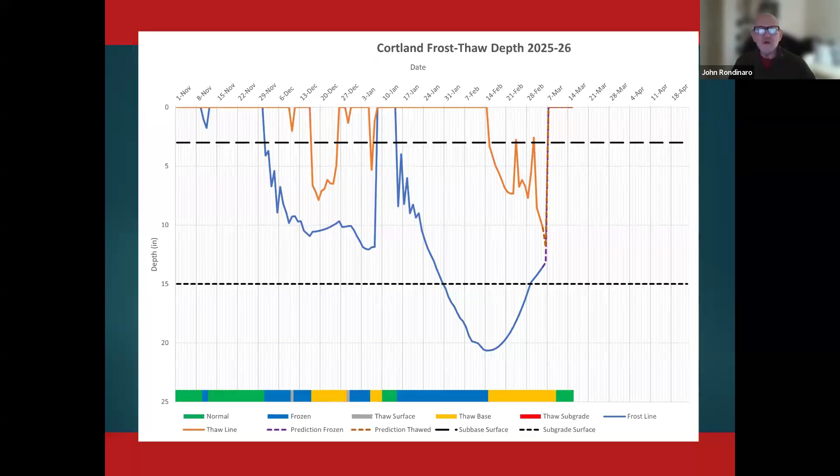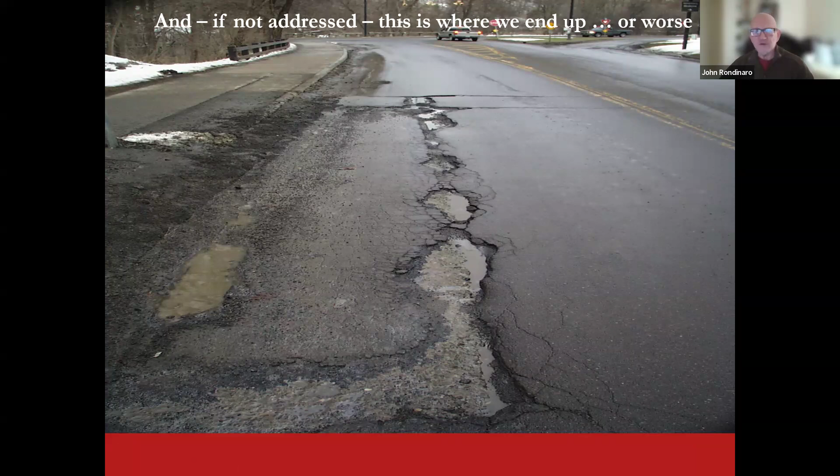We'll talk more about that in a minute. But this is just a nice example of the cycling that happens in all of our winters. This is what's happening over time, especially at the surface—we're noticing the development of cracks. This is where we can end up, or worse, where those cracks greatly advance into a well-deteriorated, well-potholed pavement section.

So stepping back to the basics for a minute, what's the purpose of our roads? They're to move people and goods from point A to point B—it's the backbone of our economy. We use a process called pavement management, our decision-making framework. Within that framework, we inventory our roads and conditions, then perform required work based on that inventory. The principles we follow are right repair, right place, right time. My add to that sequence is right way, because if you're not doing it the right way, you're throwing your money away.

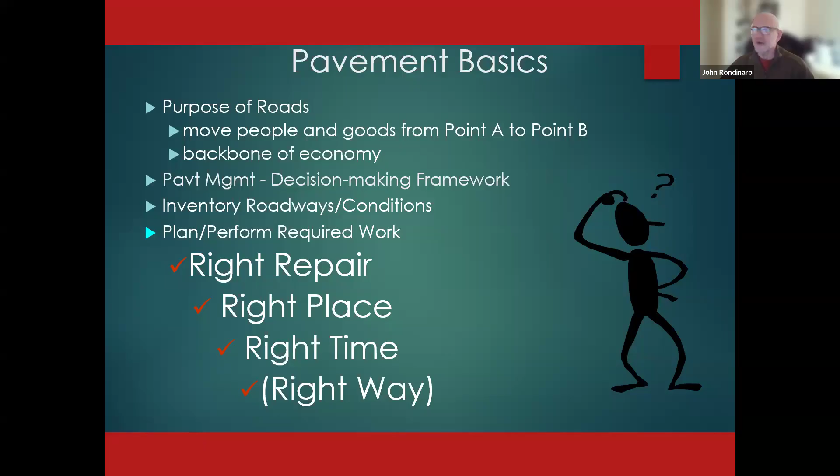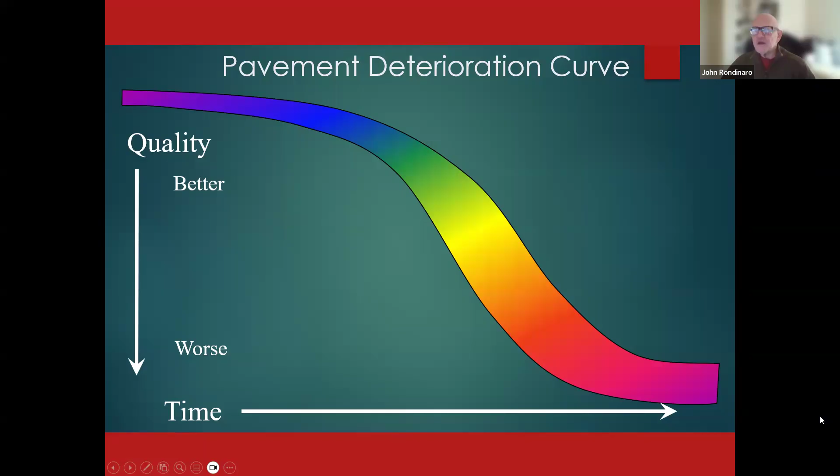Quick look at the way pavements behave over time. This is a typical generic pavement deterioration curve. You start in the upper left-hand corner with a new or like-new pavement. Over time it deteriorates from high quality to poor quality, and at some point, down at the end, it's pretty much falling apart.

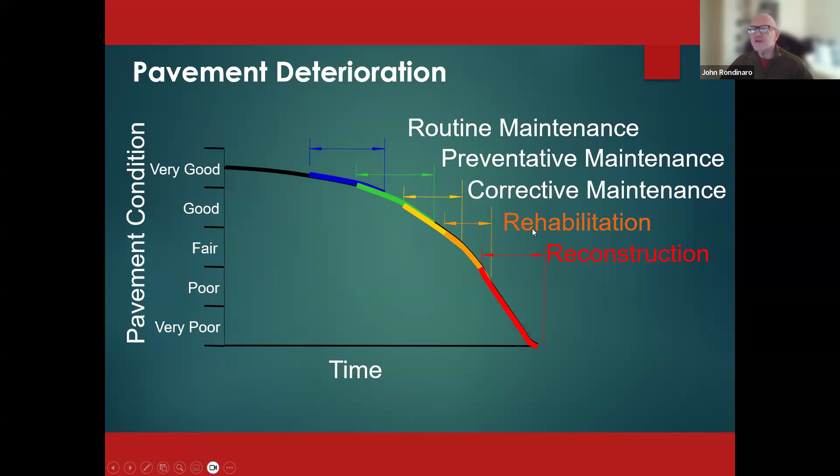If you look at that same pavement curve, you can overlay the types or categories of work that could and should be done for each condition scenario. We're always doing routine maintenance—things like mowing, shoulder and ditch maintenance. While the pavement is still in good condition, we're doing preventive maintenance, or what we'll be talking about today under the larger category of pavement maintenance. As it deteriorates toward the low end of good, you're doing corrective maintenance, and once it falls into fair or poor, you're moving into rehabilitation and then reconstruction.

And why is that important? I think probably everybody on this webinar has seen a slide like this. For every dollar of maintenance you spend when the pavement is in good, approaching fair condition, it's going to cost you at least 4 to 5 times as much in rehab. Some current assessments done by the feds have said that can be up to 20 times the cost of the pavement maintenance activities.

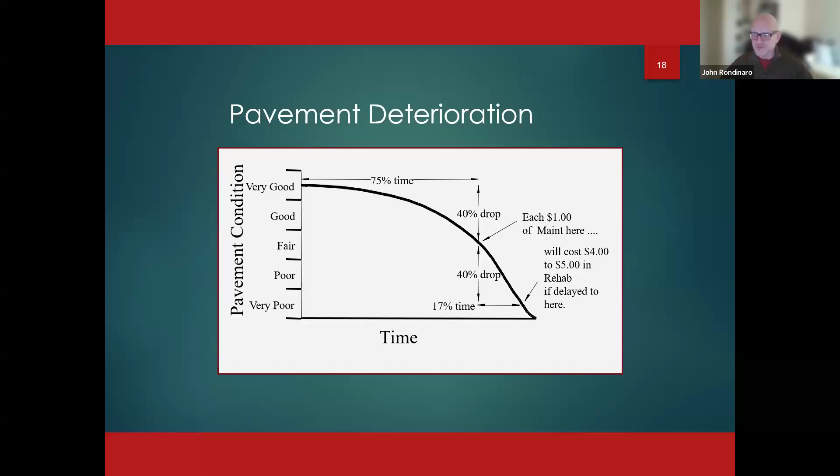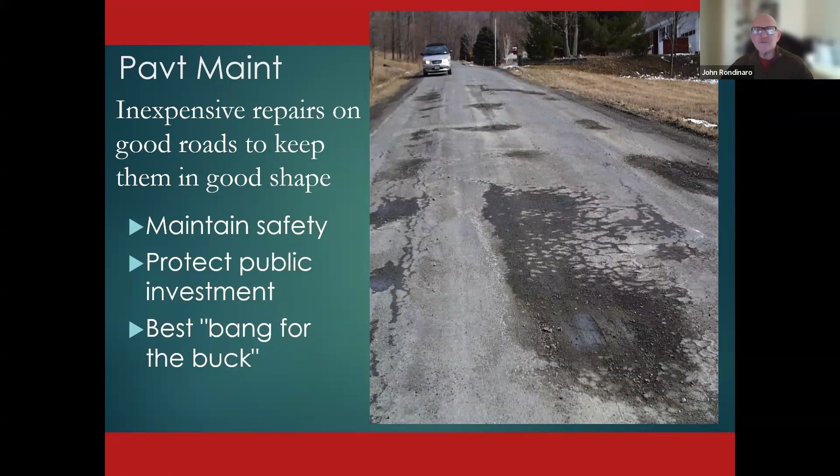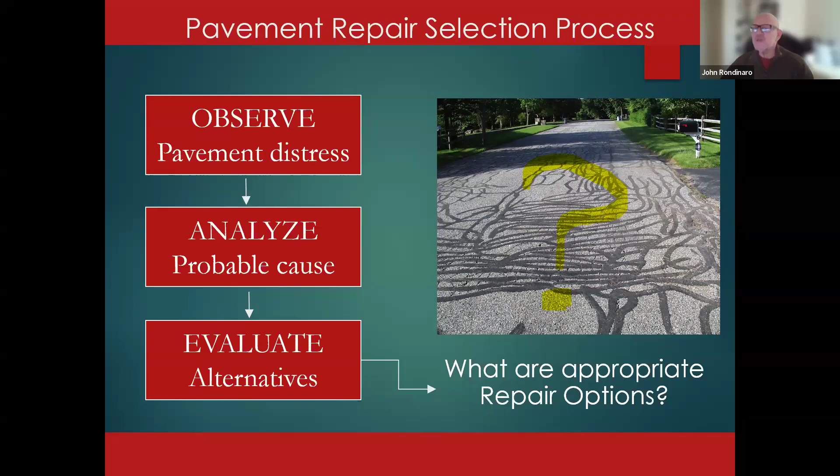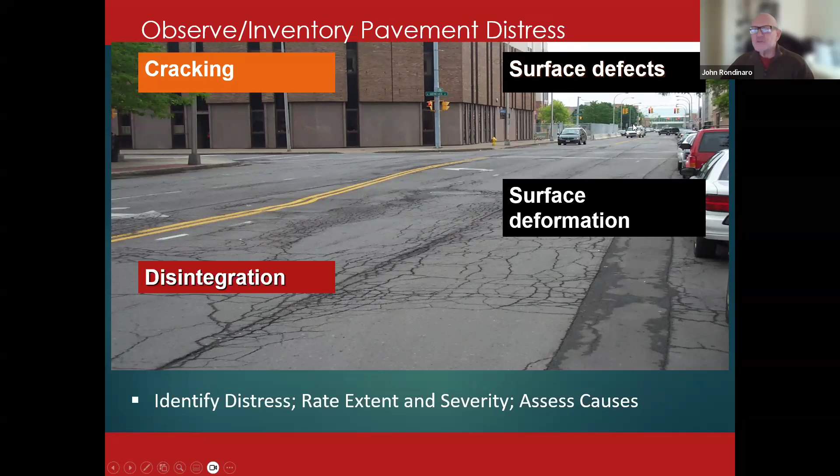In terms of inventorying and documenting our distresses, you've got 4 major categories. We've got cracking - once that cracking advances to a certain point, that pavement then starts to disintegrate. We've also got, on the right-hand side, our surface defects and our surface deformations. And within each category, you've got a whole bunch of different specific types of cracking, disintegration, surface defects, and surface deformation.

Things we really need to focus on are our longitudinal and transverse cracking. That advances very quickly into fatigue cracking, which means water and loading is really starting to tear our pavement apart. Disintegration is when those alligator cracks have advanced to the point where the pavement is just popping out all over the place. Patching is noted as a distress because that's where we've temporarily fixed

disintegration in potholes. Our surface defects, less common, but you will see bleeding, raveling, delaminations. And then a big one on the surface deformation side, we're always tracking our rutting, because when you see rutting associated with fatigue cracking, that means water and loading is really knocking the heck out of your pavements.

The key here is that you take this identification of the type of distress, then you're going to rate it by its extent, or frequency, or density - meaning how much of it is there. You're also going to be looking at its severity using some pretty simple ways of thinking about it. Extent is how much - low, medium, and high. And severity is how bad - low severity, medium severity, or high severity.

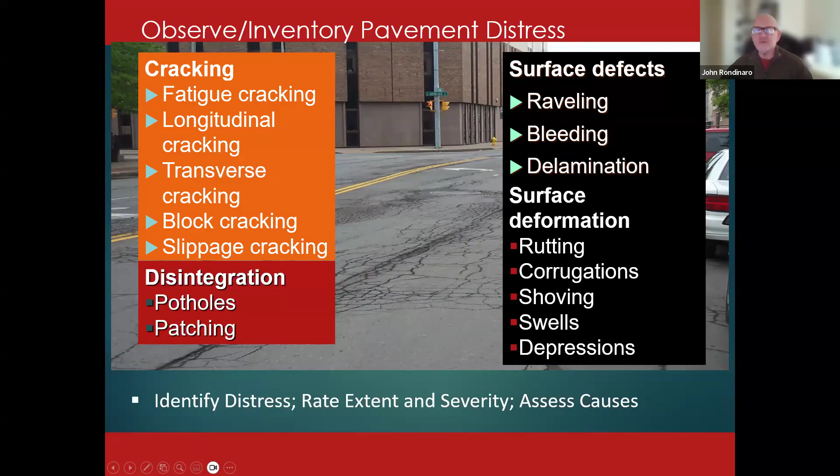On the other part of our treatment selection process, we've got the tools of the toolbox, and we've got two major groupings of our treatments. Like we're talking about today, we've got our pavement maintenance category, or pavement maintenance treatments. The key here is we're not providing any kind of structural strength. In that grouping, we're talking about crack repairs, patching or area repairs, and our thin wearing courses. On the other side, we do have to always consider, regardless of how good our pavement maintenance efforts are, all of our pavements eventually wear out.

You're going to have to do pavement rehab at some point in a pavement's life. We design our asphalt pavements for a 25-year life. And if you can get in there with a really robust pavement rehab at 25 years, you can buy maybe up to 50 years.

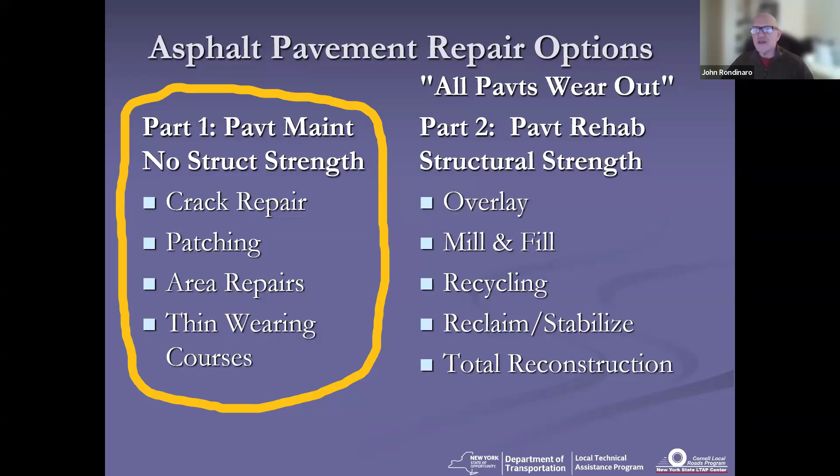With that, we're always talking about adding structural strength, or restoring structural strength to that pavement section. Within that category, we're talking about overlays, our mill and fills, a variety of different recycling techniques, reclamation or stabilization on our low volume roads, which most of us are talking about today. And then last but not least, when you've run out of options, total reconstruction.

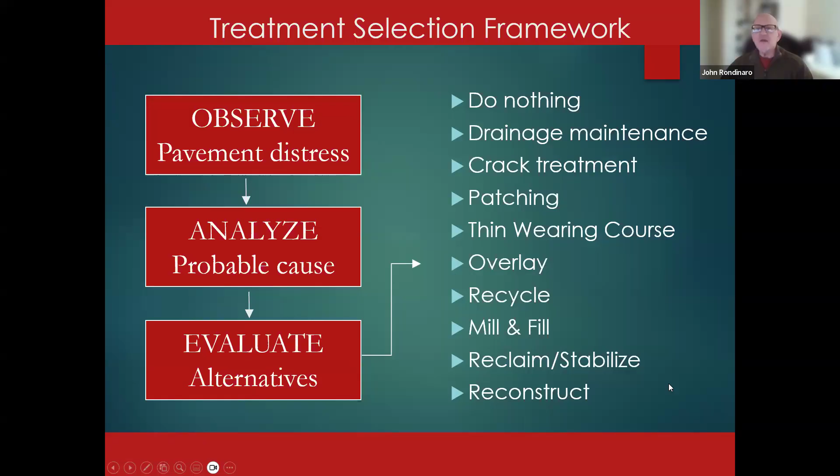So you marry all that together - you're talking about our analysis process and evaluation process. You've married that up with our tools in the toolbox, and that brings you to your decision-making activity. But before we make that final treatment selection, we've got a fundamental question to ask and answer.

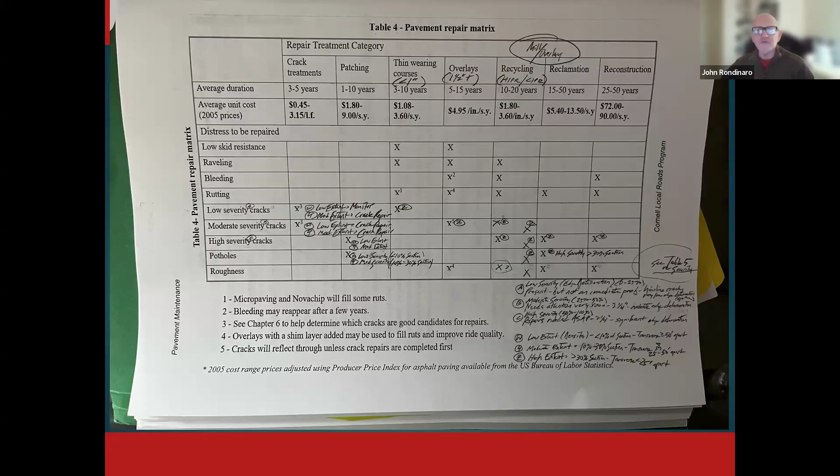We'll just hold that for a second. I would say everybody's right, because a couple years ago, based on when you got boots on the ground and did a real close review, in close coordination with your supplier or contractor, you might decide you can get away with putting a maintenance treatment down now, a thin wearing course, because it doesn't look like you have any drainage problems, and the pavement has good cross section, hasn't lost any of its shape. You might get away with it. I would argue I think you need something a little more robust, but I could see how you could make that argument.

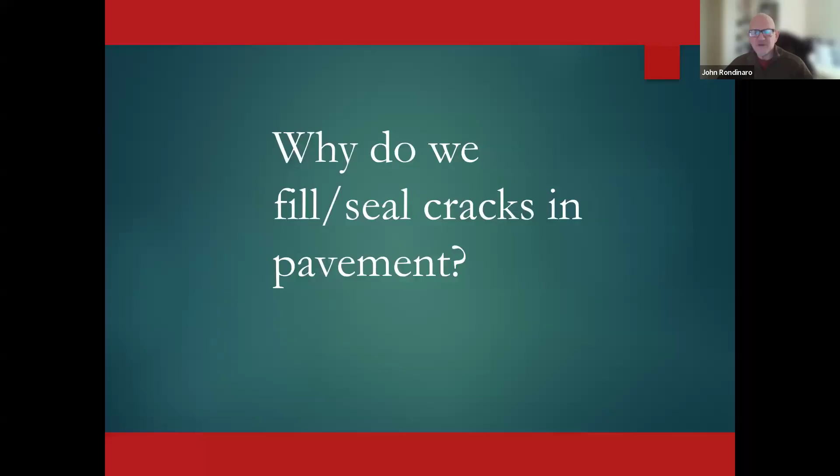All right, so let's bang through crack repairs real quick. Why do we fill and seal cracks in pavement? Well, we're filling and sealing because we need to prevent or reduce the flow of water and debris, and we've got to reduce the rate of deterioration.

The things you've got to consider are your crack density, how much cracking, your deterioration, which is really your significant measure of how severe the cracking is, whether it's a nice clean vertical wall or whether the entire wall or top edge of that crack is all kinds of raveled and falling apart. You're looking at your width, which David just mentioned - once you get to a certain width, it's no longer able to perform well when you're putting sealant into the crack. And you've also got to think about the movement of the crack, because our pavements do move with the change in temperature.

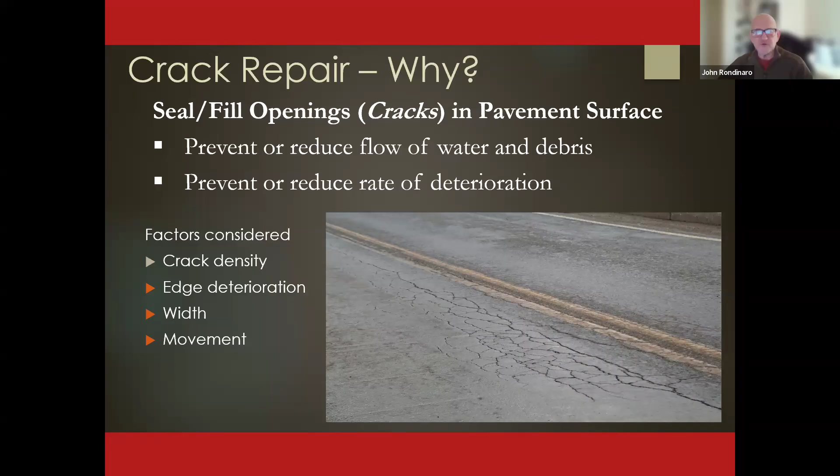We've got a nice table in the workbook that does a nice job of giving you a simple way of looking at it. What I want to point out is up in the upper left-hand corner, when you're talking about your crack density, how much versus your severity - when you're low density and low severity, you're pretty much just monitoring. You're talking about hairline cracking.

Once you're into the moderate category, so anything from low to moderate density or frequency and low to moderate severity, we're talking about our crack repairs, either filling or sealing. Once you fall into the high category - high density and still up to moderate level of edge deterioration - you're really talking about thin wearing courses. If you're talking about high severity but low density, then you're talking about patching. And once you get into high and high, you're really talking about rehab.

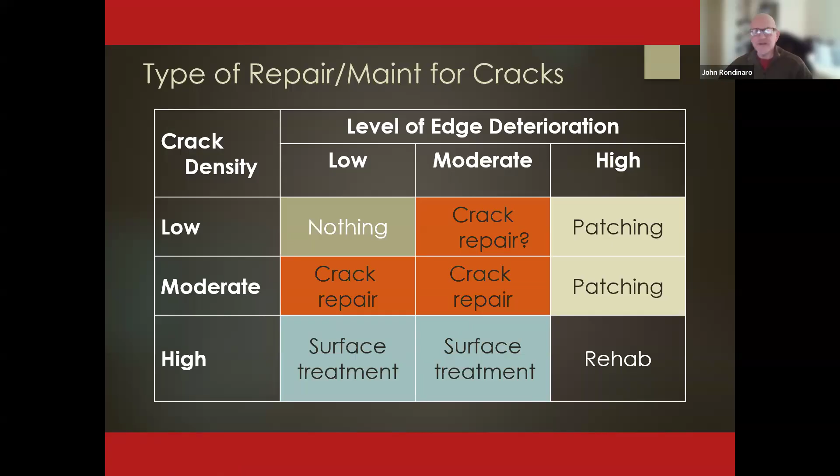So differentiating - what is the difference between sealing and filling? Crack sealing, you're dealing with working cracks, meaning they're moving with the changes in temperature. As the temperature rises, the pavement is expanding and those cracks are getting narrower. As it gets colder, which is the real key, that pavement is contracting and those cracks are getting wider. You're talking about crack widths of 1/4 inch to 3/4 inch, and movement defined as anything up to a change in width of 1/8 of an inch. These are considered working cracks.

When you're talking about sealing, you really don't want a lot of edge deterioration. The key here is you're using a modified and engineered material, putting some sort of material in it that's going to make that crack sealer behave like a rubber band, preventing the intrusion of water and debris into the crack. Crack filling, you can get a little wider, but you're really talking about non-working cracks. At DOT, we considered every crack to be a moving crack.

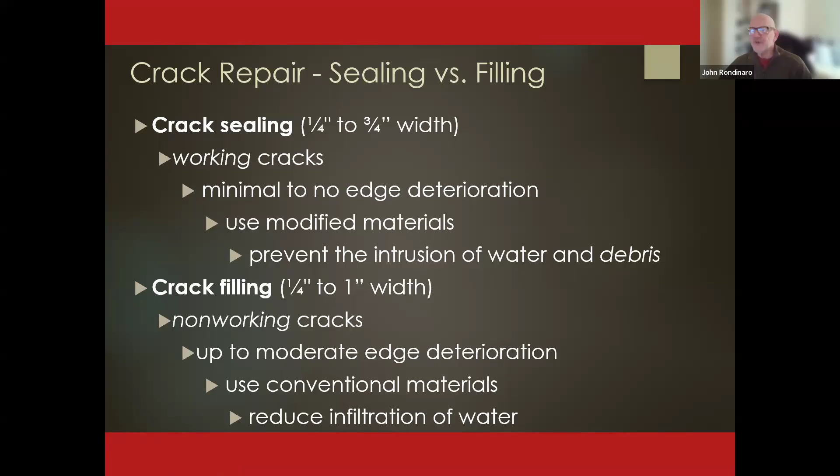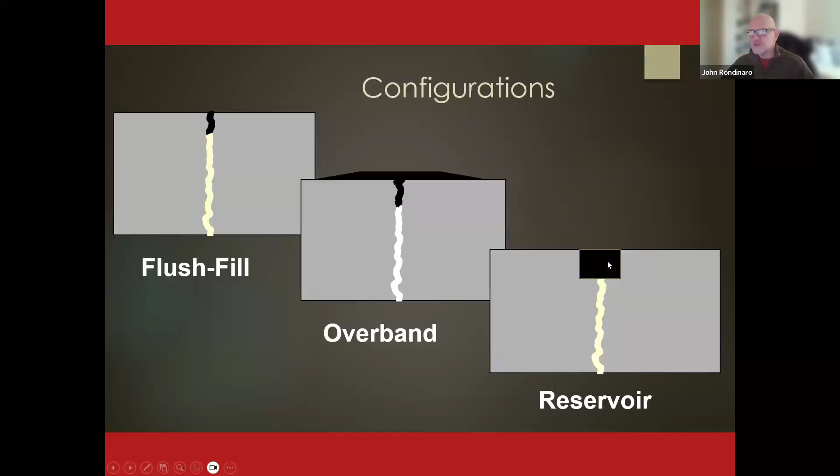In terms of configurations, you've got a conventional flush fill, where you're just trying to inject the material into the crack itself. Overbanding is the same kind of thing, only then you're leaving a significant thickness of material over the top of the crack, probably up to 4 inches wide on either side. Then there's the preferred method, a reservoir technique, where you're actually cutting open that crack, creating a new, clean cut surface, and then injecting the material into that reservoir.

In terms of your construction operations, you've got your cutting, cleaning, drying, installation, and finishing. Blotting, while optional, is not recommended, and I don't believe anybody really does it. So in this case, you're seeing a router cutting the crack.

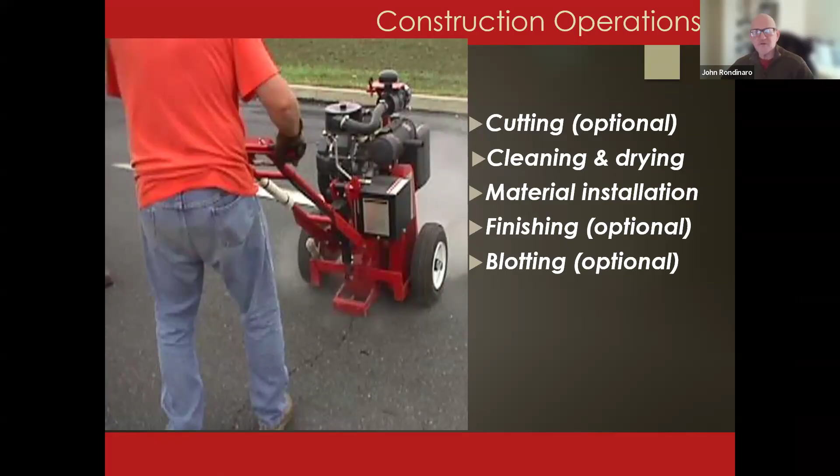Here we've got the cleaning operation, and we're talking about either, at a minimum, blowing it out with an air compressor, or one of the preferred ways, hitting it with a heat lance, although you've got to be a lot more careful with that, because while you're drying it out, you also have the risk of burning your pavement.

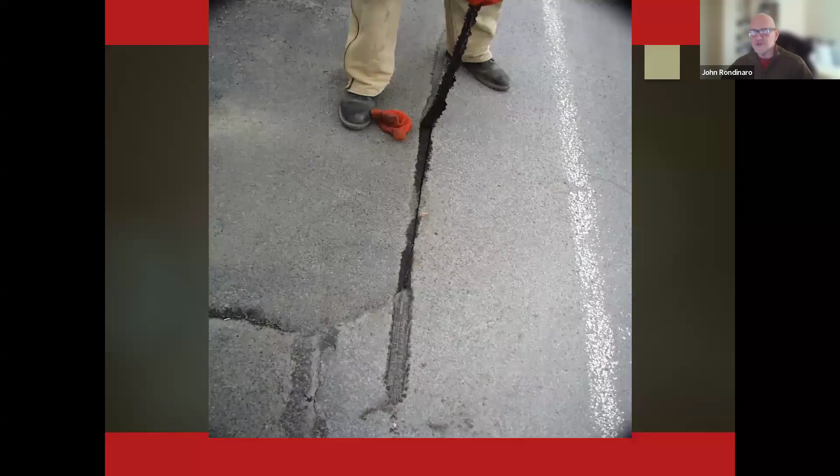The critical nature of that cleaning and drying is, if you don't get it clean and dry, even if you're using your engineered materials, your material is going to pull right out of that crack. Here's a conventional rig for applying crack sealing.

This is what it looks like at the end of the hose. You've got your nozzle, which is injecting, and then you've got that disc right at the end of the nozzle, which gives you that nice thin skin of crack sealing material. Very thin thickness, it's a film, and that's going to lock that water right out.

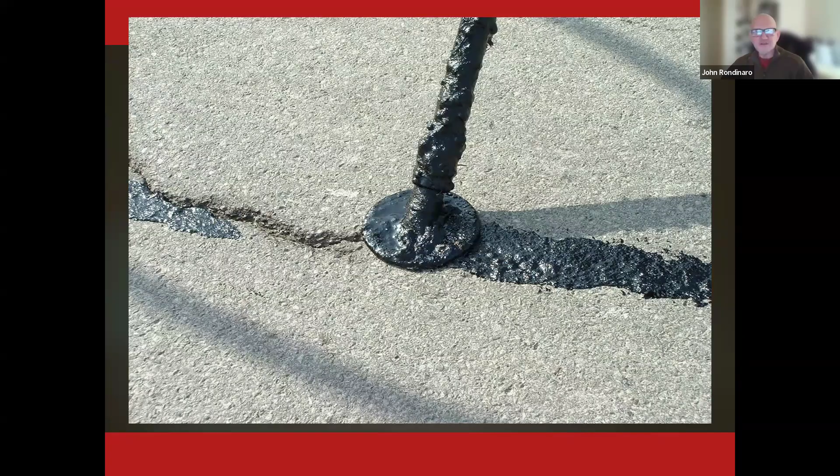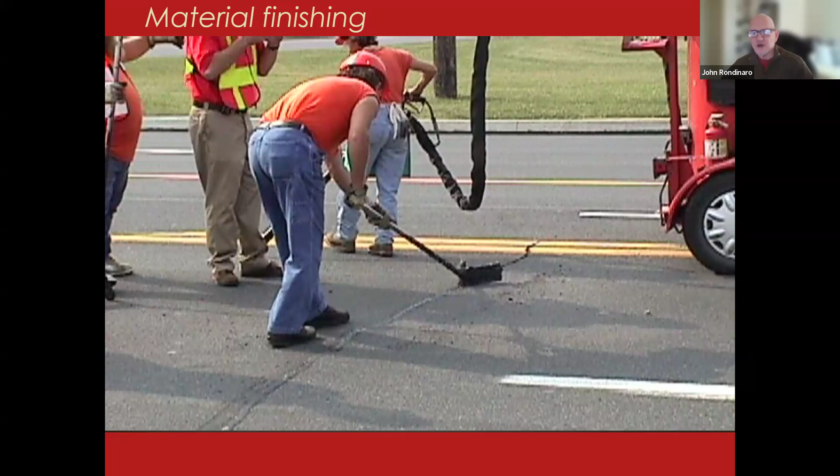Then you're finishing it off, and probably the easiest way to do that is getting a squeegee from Home Depot, putting a V on the end, and it's going to knock a nice little indentation in the surface of that crack sealing material. Your final section looks like that.

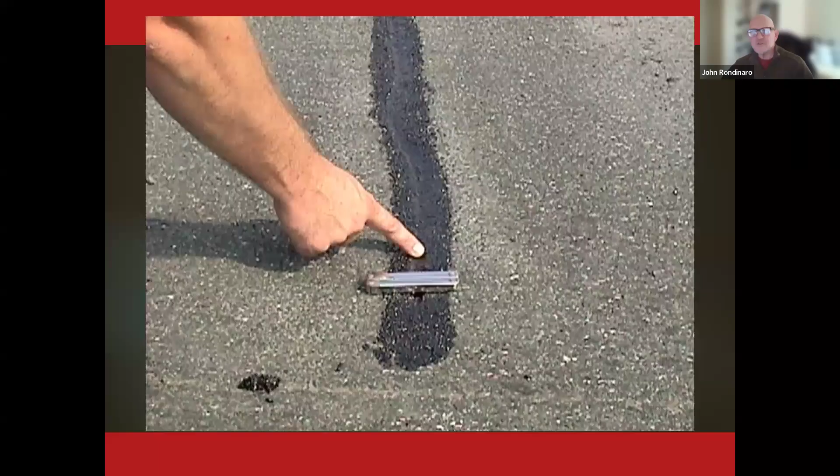You just want to get about a fingertip depth below the surface of the pavement at the time you're doing the work, because you want to be able to adjust. You really don't want to be squeezing that material up over the top of the surface as the pavement expands when it gets warmer.

In terms of conditions for the sealing itself, you really want pretty good conditions: temperatures 40 and above, humidity less than 80%, and no chance of rain. Now it's a perfect time of year to start, depending on where you are in the state, since you can really see clearly where your cracks are, and then make decisions about whether, as the weather gets better, these are really where we want to be doing our crack sealing activities.

Quick show of hands: how many folks out there are using crack sealing as part of the tools in the toolbox?

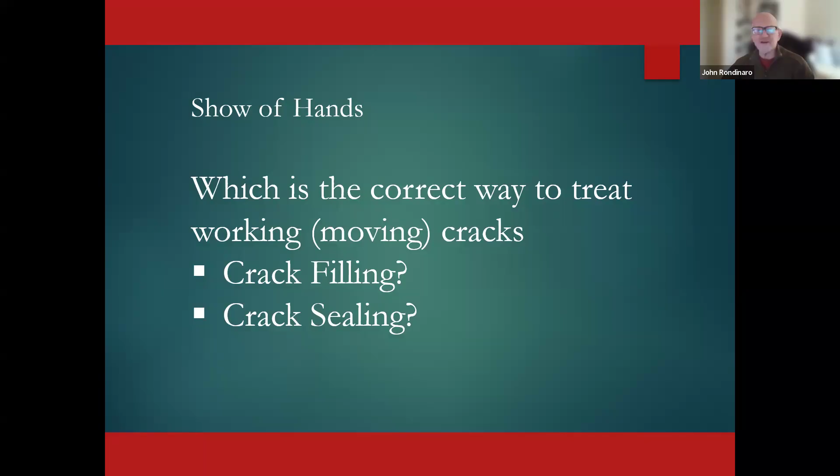Quick question: what's the correct way to treat working, moving cracks? Who says crack filling? Show of hands. Anybody? The answer is nope. Show of hands, crack sealing - you should see every hand raise. You need to use crack sealing because you're using engineered or modified materials which can move with the movement of the crack. You want that sealing because it behaves like a rubber band.

Any other questions on the crack sealing side? How long should it stay above 40 and no rain? It should stay above 40 - I would say consistently above 40. Back in my maintenance days at DOT, you'd want at least a week without water, before and after, to give that material a chance to cure well. That was just a rule of thumb - sometimes you don't want any dampness to affect that material's performance.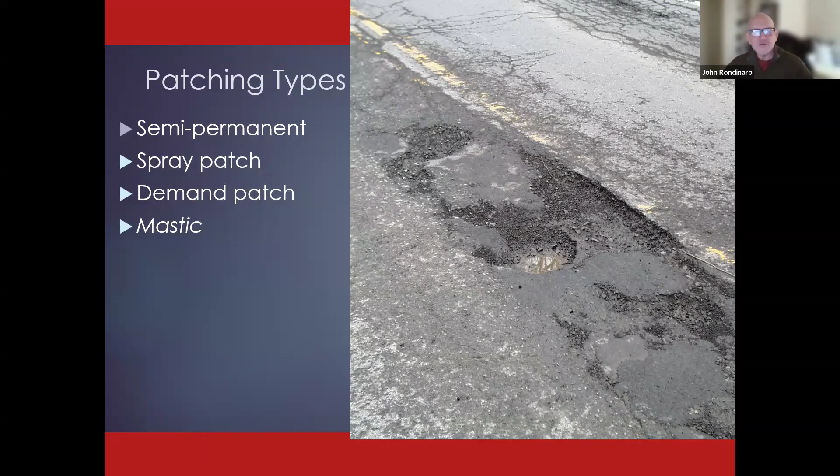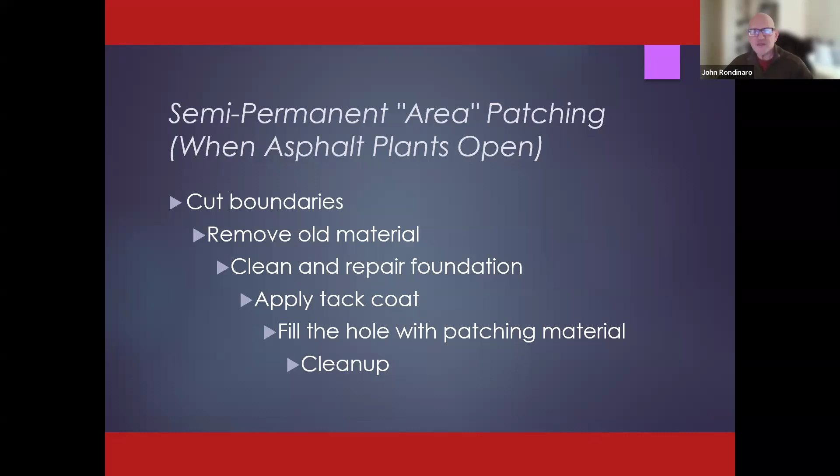In terms of our semi-permanent area patching, that's when our asphalt plants are open - it's a pretty straightforward construction process. You want to cut out pretty square boundaries. Every time you've got a jog or a change in angle, you're creating a weak spot, because those are the hardest spots to compact. So really you want a rectangular boundary. While you may have saved yourself a little in materials, you've introduced a lot of weak points and more work.

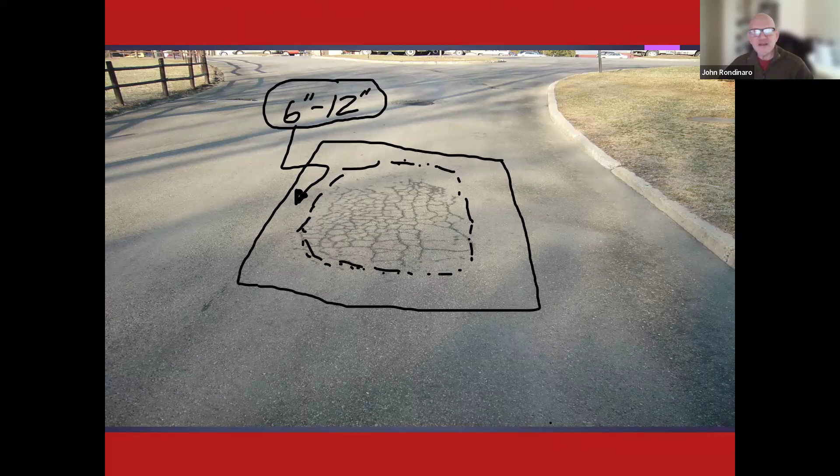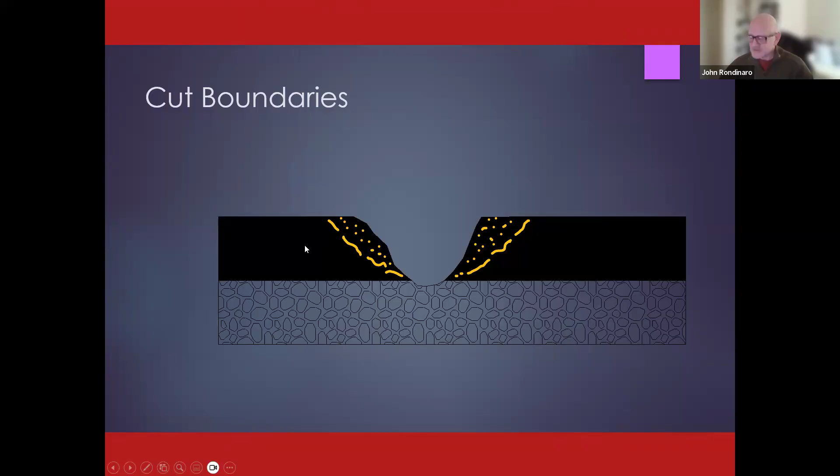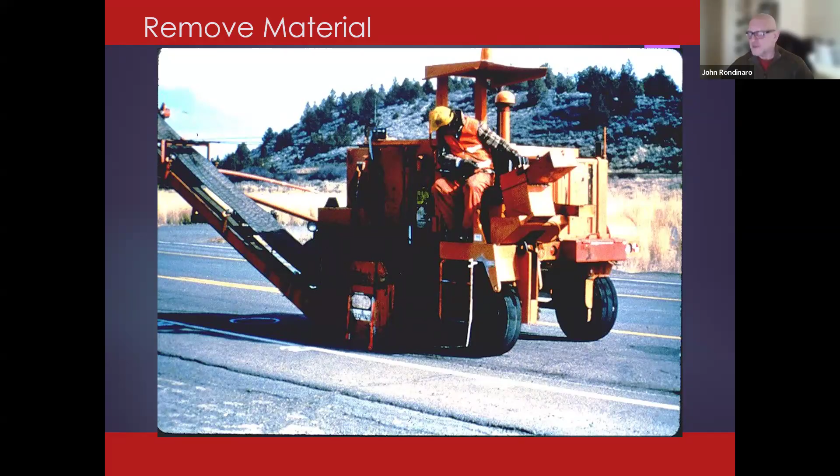What you want to do is square up around that distressed area. You want to get outside of it 6 to 12 inches, because even though the surface edge is here, your weakened material extends 6 to 12 inches outside of that surface boundary. You want to get that boundary cut and that material removed - there's all kinds of equipment that can be used. The only thing we want to stress is don't go in there digging it out with a loader bucket, because you're going to do nothing but bust up the adjacent pavement. We want to get it cleaned out.

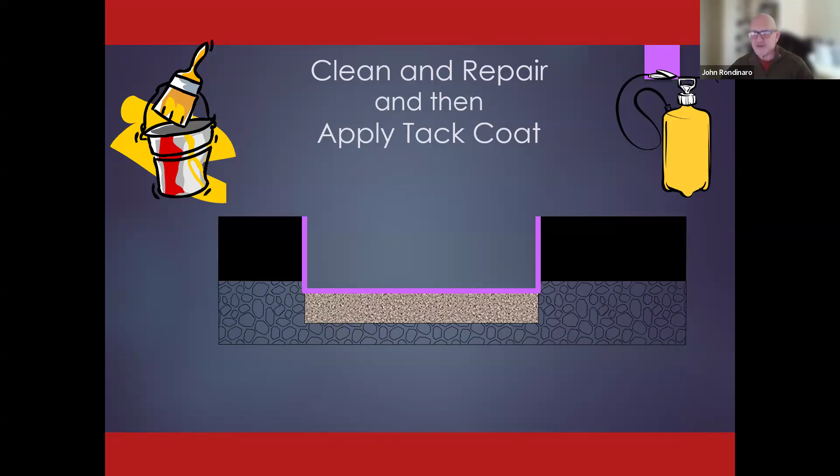You want to apply tack coat because you really need glue between that existing blacktop pavement and the new blacktop. Fill the hole, and make sure you've got 25% extra material, because the rule of thumb is you're going to get a quarter inch of compaction for every inch of compacted depth.

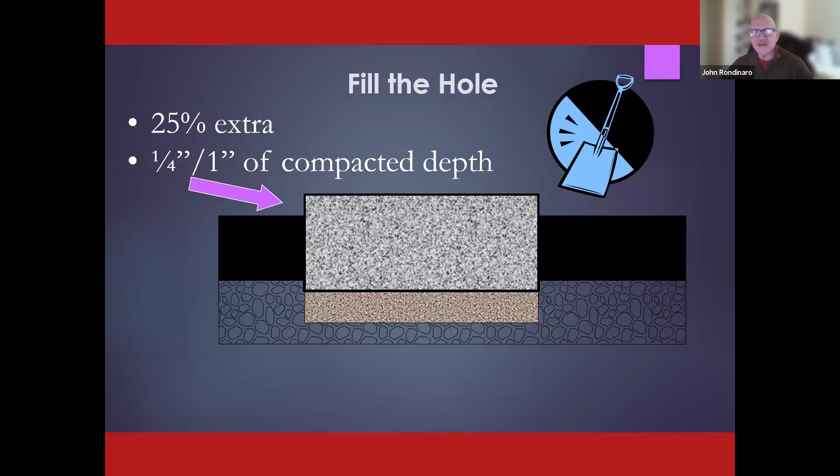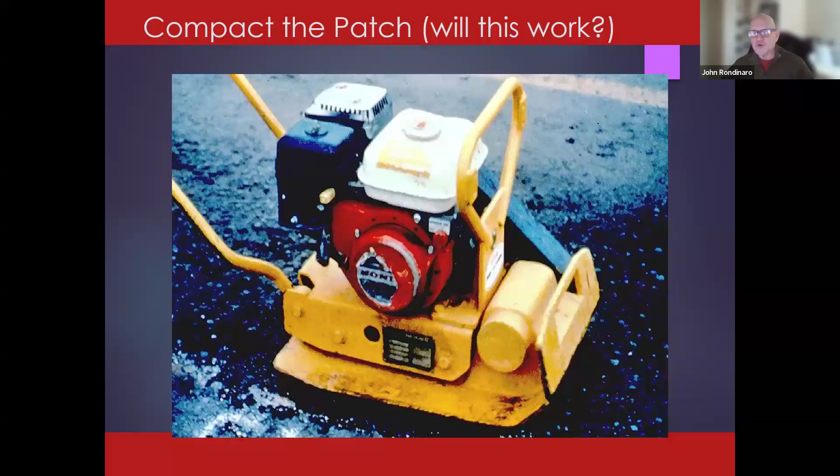If you can get in there, if your hole's big enough, you want to be using some sort of small roller, and then you finish cleaning up the patch.

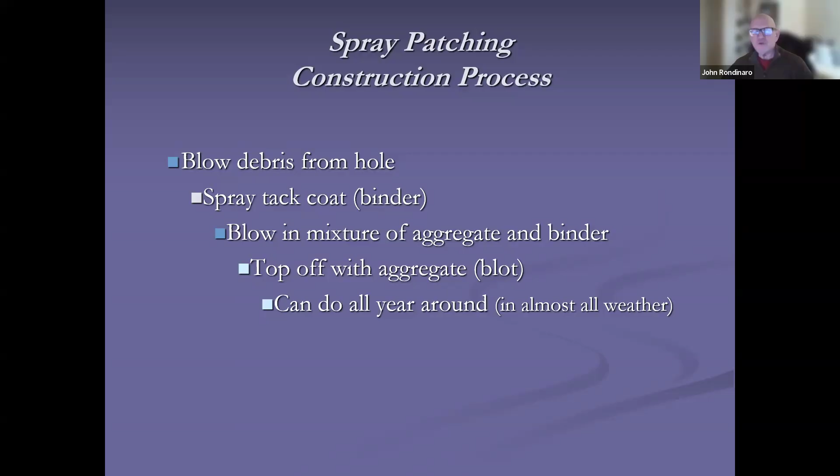Spray patching is another technology. That's an all-in-one technology. You don't see a whole lot of it around New York, but some other parts of the country use it more.

Really quickly, you've got either towable equipment or automated equipment. In this case, you've got a self-contained unit that's got both your aggregate and your emulsion, and by changing your different controls, you're able to roll up over the top of that hole.

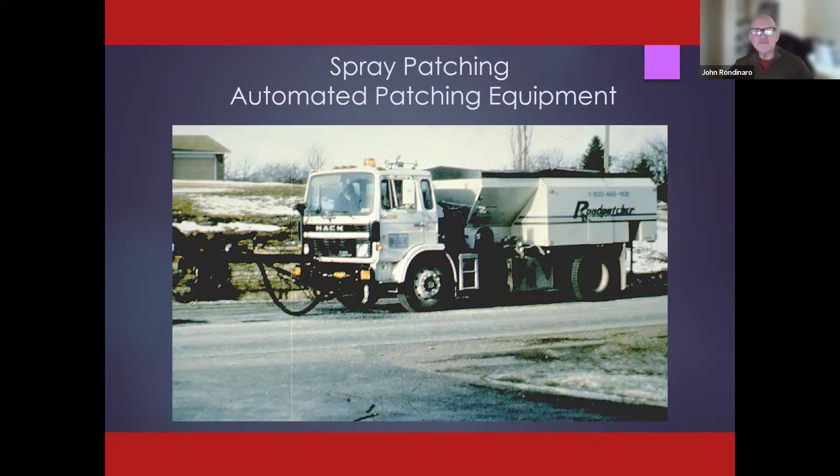You're going to clean out that hole, spray in your emulsion, spray in your aggregate, and then move on. But here's what we spend a lot of time doing, and this picture is probably very familiar to anybody in the audience.

We do this kind of work in the worst conditions. And why do we perform temporary pothole patching? We're trying to keep our pavements from looking like this, and it is a safety related issue.

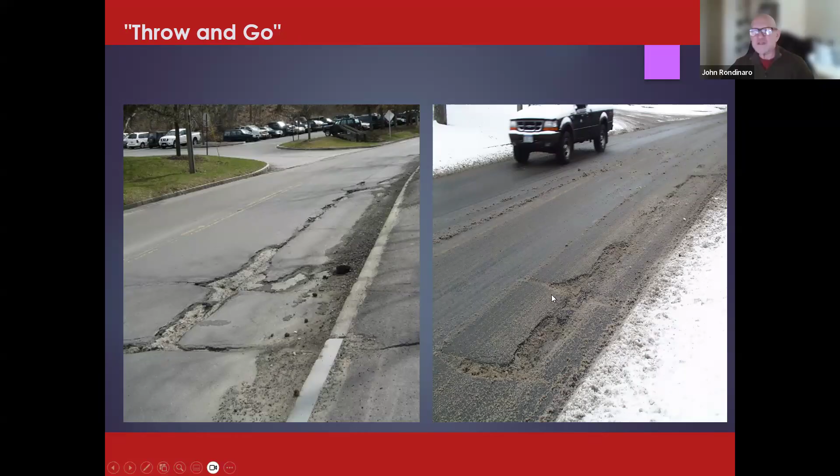One thing I want to point out here is this was using an old school technology called throw and go. You were using a conventional material, put it in the patch. This is a photo David shared. I believe 2 or 3 jurisdictions hit that same set of holes with the conventional materials and hit it with a shovel a couple times, moved on, and about 5 seconds later, that's what that hole looked like again.

What we really want to be doing is using the throw and roll technique. It's a good idea to get any debris or water out of the hole, but not required. Get that material, and you can see the glossiness, the shininess. This is an engineered material.

You're putting additives in it that make it behave like a rubber band. You're going to hit it with a high pressure tire. The key here is that high pressure tire is what's going to be activating those additives, locking all those materials together and giving it its flexibility to behave like a rubber band.

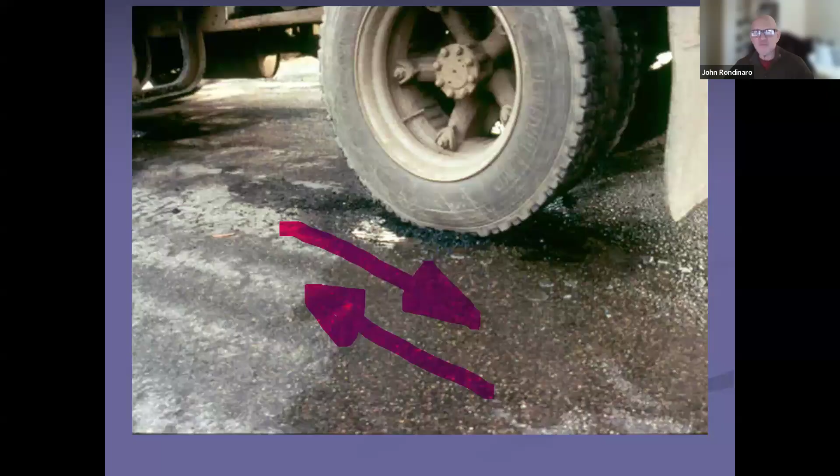So you've rolled over it, rolled back over it, rolled forward, and you're moving on. The only thing I'd say is to knock those high edges down, but that patch is good to go, and that's going to last for a minimum through the season.

So switching gears a little bit: we've got a long section of roadway with a lot of large cracks over an inch wide and high levels of deterioration, but you don't have enough money to do a rehab project. What are you going to do? I'll give you a couple choices - throw them into the Q&A. Do nothing, crack seal, or something else.

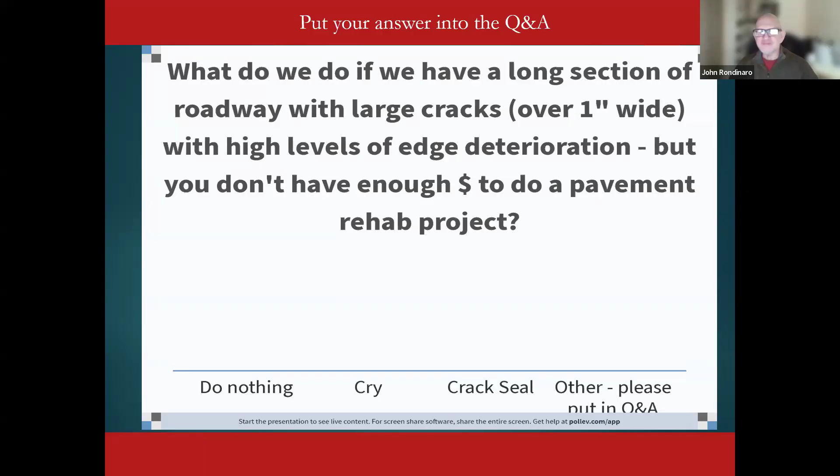Amanda or Jody, let me know what we've got. Looks like everyone's typing their answer. We have crack seal, reservoir fill, all crack seal. Okay, so I think we got a good flavor.

So we've got material called mastic. It's a hot poured modified liquid asphalt that's pre-mixed with lightweight aggregate. You can use either a coarse aggregate or a fine aggregate. You use it where you've got large cracks, very extensive alligator cracking, or very severe cracks.

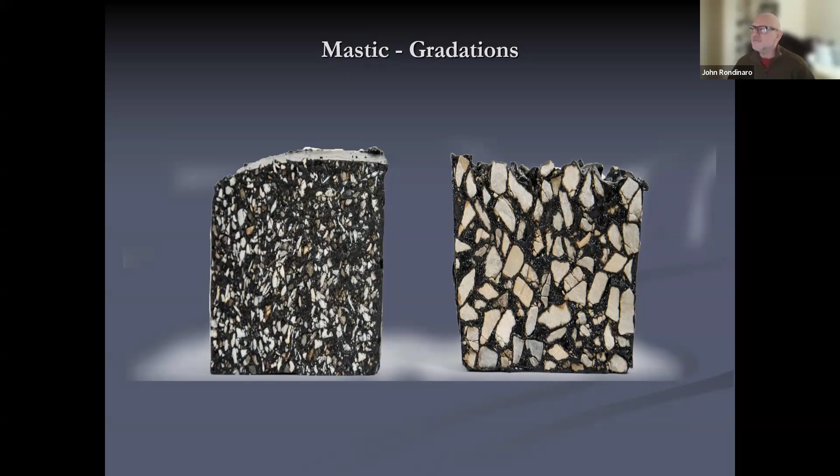It's got to be clean and dry, like you would be with crack sealing, but you can apply it when it's very cold, as long as you get that pavement temperature correct. It's discharged out of the back of a melter unit and poured directly into a hole, or spread thinly over an alligator section. This is a technology that continues to be advanced and used a lot.

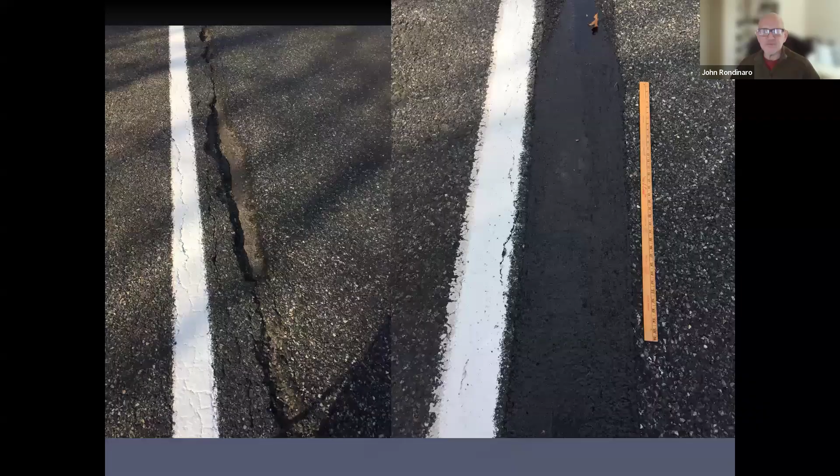On the DOT side, when I was there we were using some of it, and now we're using it extensively. Here you've got a big hole, you put a nice little band of mastic over the top of it. You can use it on concrete. Here it'll adhere to rebar, so you're fixing your approach section as part of the rehabilitation work. You're applying it out of the back of the melter.

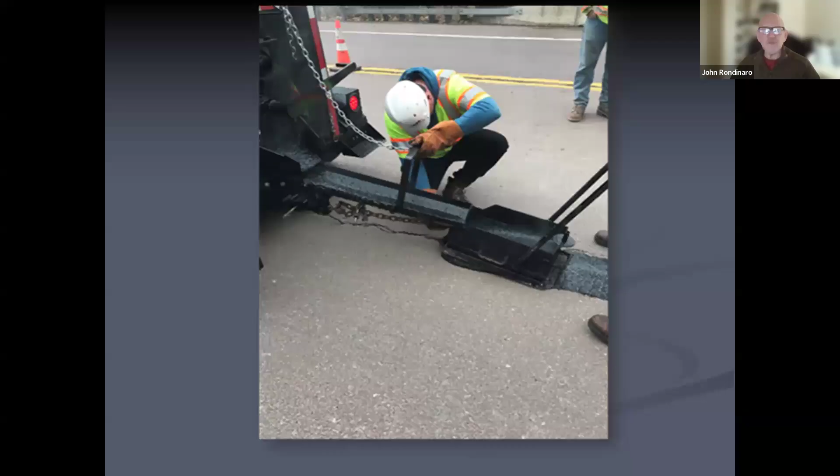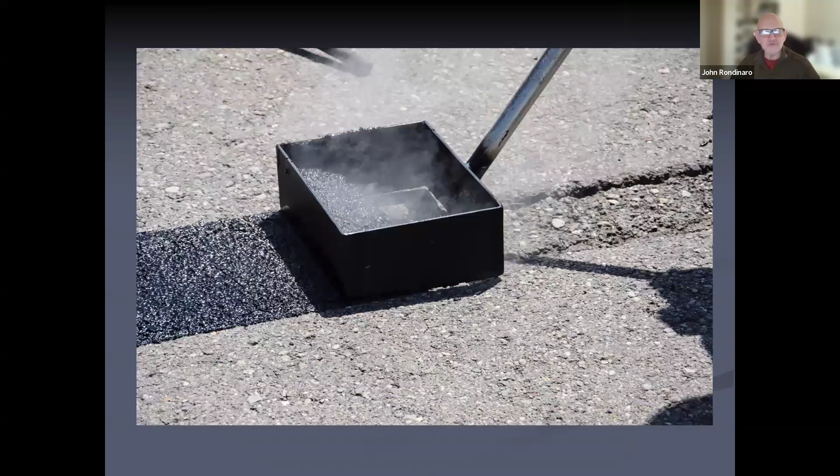Here you're using a nice little drag box rig, a different sort of drag box rig, hand loading it. Here's a nice little buggy that they're using to apply it. Again, you've got a nice wide crack, well cleaned, but then you're just getting a nice band of mastic in there, and that's going to hold forever. Here you're using it in an application where you've got a lot of spider web cracking, using the fine aggregate mix and spreading it out and covering it up nicely.

Same approach. What's next with mastic? It's continuing to be developed, and it is available under the OGS contract. Apparently not many folks in the audience were thinking about it or using it. I think this is another one you really want to get as a tool in the toolbox.

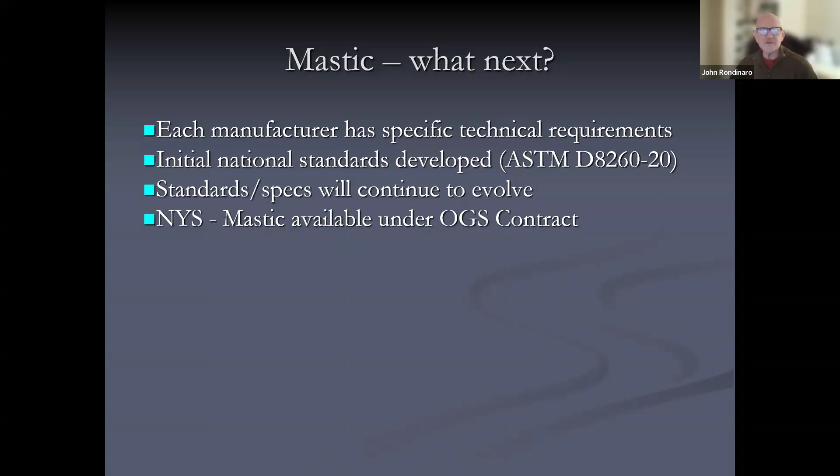All right, getting into the home stretch, I want to talk very quickly about our thin wearing courses. We've got a whole bunch of techniques or technologies that we use here. Think of your thin wearing courses. We had some questions from the patching section. So what is the material under the patching material?

Under the mastic, perhaps? Can be either asphalt or concrete, doesn't matter, just needs to be clean and dry. And then what is the lifespan of mastic?

That's a good question. I don't know what the current numbers are, but if I recall correctly, you could get it easy 5 years, depending on its application.

And then the last one, does mastic affect the friction of the pavement? Great question. Because it comes pre-mixed with lightweight aggregate, and it's a super high friction aggregate, you're actually enhancing the friction rather than decreasing it. Whereas with crack seal, you don't have any aggregate, all you've got is the liquid asphalt surface, and that's why you have to be careful with putting down too much crack sealer, because that crack sealer is not giving you tire friction.

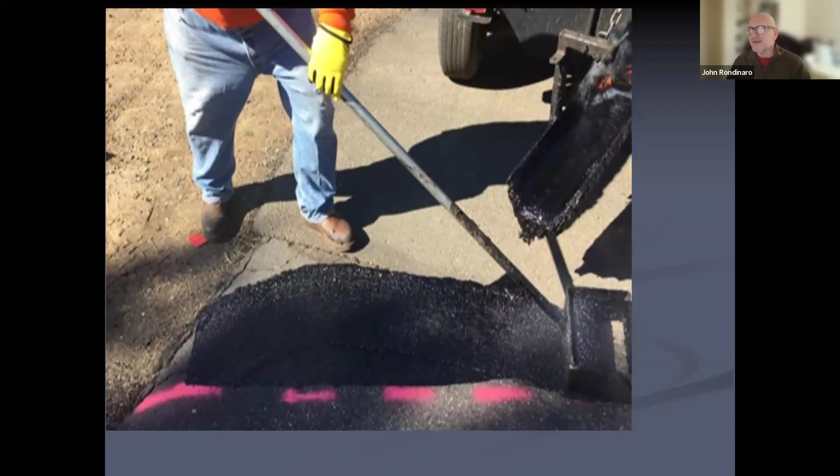It's kind of in the same range as your crack sealer. You want that pavement temperature at 40, but what folks are finding is there's different ways you can get that pavement temperature up to 40. And then you can apply, as long as you get that pavement temperature up to 40. There have been some states applying it in some very cold conditions, but they do go through a process to get that pavement temperature up to 40.

John, it looks like that's it for now. Okay great, so let's get into the home stretch. We're looking at our thin wearing courses.

This is what you want, this is what a surface should be. When you see your surface looking like this salt and pepper look, that means water's starting to infiltrate and you want to hit it with some sort of wearing course. Think of your wearing courses as a coat of paint. What you're doing is restoring your skid resistance, restoring your oxidized surface, sealing up and protecting that pavement, and you can be filling minor ruts.

You've got a handful of different types of thin wearing courses. You've got our chip seals and our sand seals, these are emulsion-based processes. You've got our slurry seal, which is an emulsion-based process that comes out of a self-contained unit. Microsurfacing is slurry seal on steroids, where it's an emulsion-based process that you're adding a polymer modifier to, giving it higher elasticity and performance.

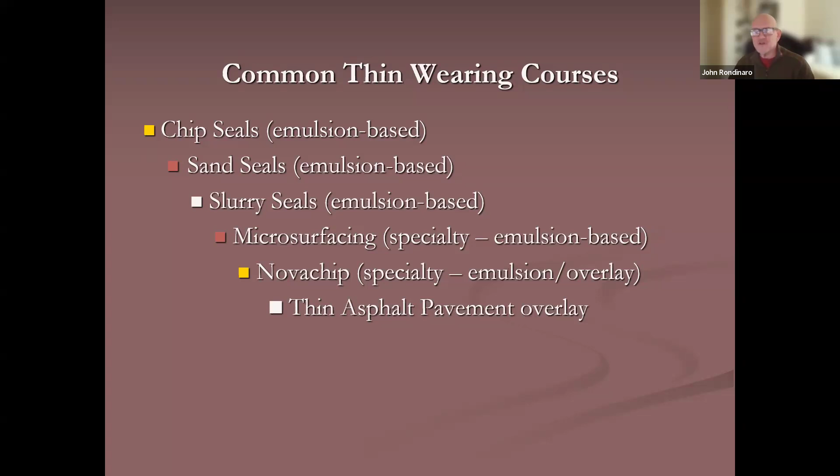NovaChip is a specialty where you're combining that emulsion-based process with a thin overlay. And then we've got our conventional thin asphalt overlays. We'll look at them all real quick.

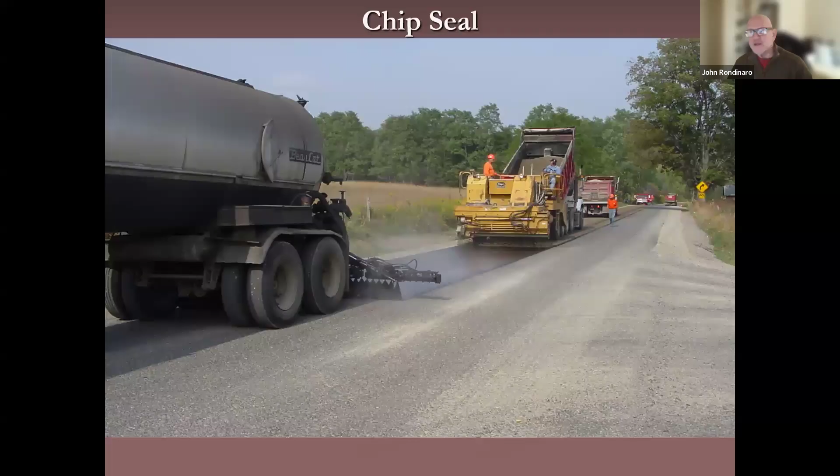Here's a chip seal in action. What you want to think about here is you've got a nice distribution of your emulsion coming out of the liquid distributor, and then you're following up tightly with your aggregate spreader. Notice the nice brown color of that emulsion. Sand seal is the same animal, but you're using a finer aggregate.

Quick show of hands. When you're applying that surface-based, emulsion-based surface treatment, like a chip seal, do you want that emulsion to be a deep black color prior to applying the aggregate? Yes, give me a show of hands for yes. Deep black color, what do we got, Amanda? We're at 10, 15, hovering around, up to 20. Okay, well, I gotta disagree with the 20 of you. No, you don't want it black.

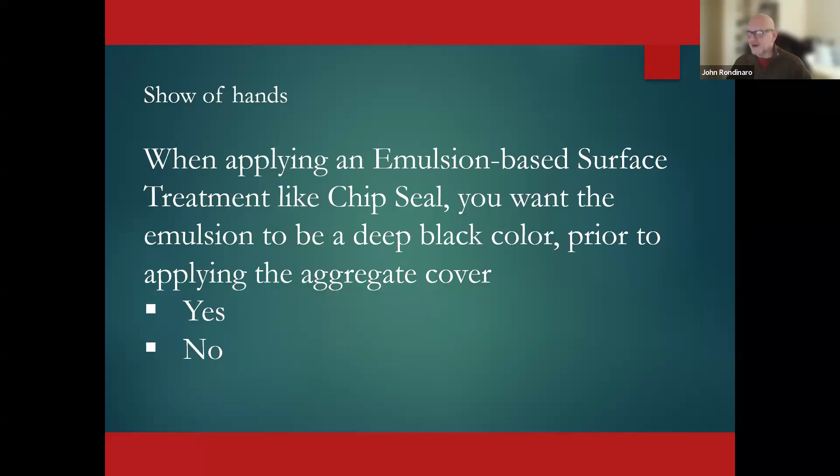What you want is a nice brown color, because that emulsion is a blend of tiny droplets of asphalt that have been blended into water at high speed, and that creates a suspension which gives you that brown color, the black of the asphalt being diluted by the water. So that's how you're getting a brown color. Once you see black, that means that emulsion has broken and the water has separated from the asphalt.

So you've got that suspended emulsion. It hits your aggregate, it locks onto that aggregate, and that is when that break starts. Once you're in contact with that pavement, that water is completely separating from that asphalt, and you're no longer going to be able to bond to that. That asphalt no longer bonds to the aggregate.

And then within a week or two, you've got what you call cure, where that water has completely evaporated, and now that asphalt film, hopefully with aggregate mixed in for your chip seal, is going to be over the top of your pavement.

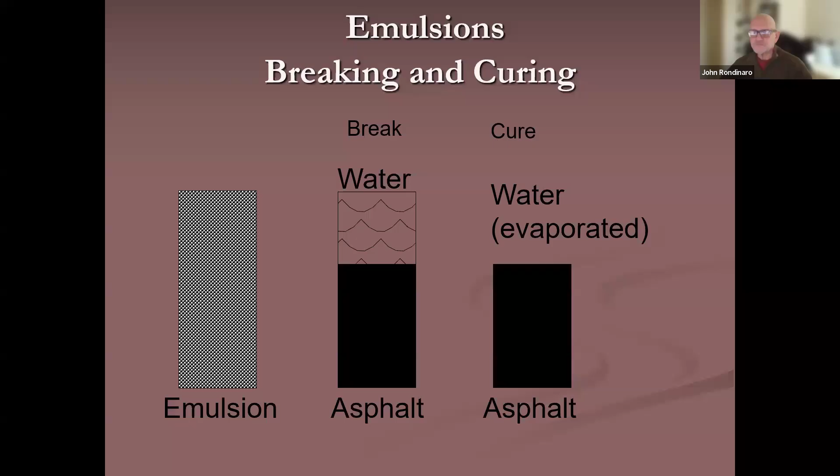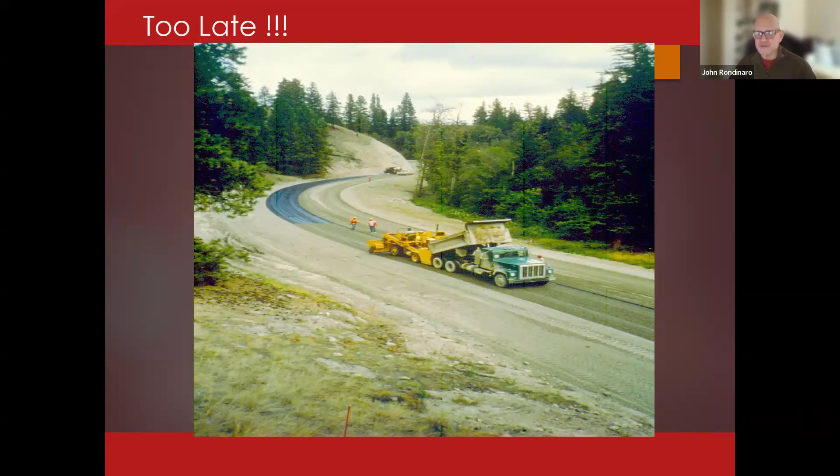So if it looks like this, no go, that aggregate is not going to stick. And you get yourself in a situation like this, and these guys are aware of it, they're in a world of hurt. They got to figure out what they're going to do next, and it's not an easy answer.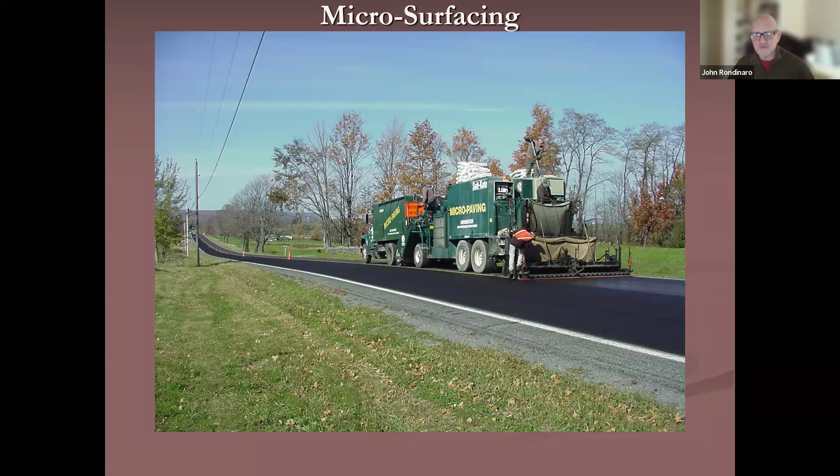The advanced version of that, your slurry seal on steroids, is your microsurfacing. A lot of that being done in the state. Real great technology, and one of the nice parts about it is you can fill ruts with it. That's what the Germans used it for initially, what they invented it for, to fill ruts on the Autobahn. You put a little rig at the back of your unit, and you can put down a rut fill course at about three-quarters of an inch thick.

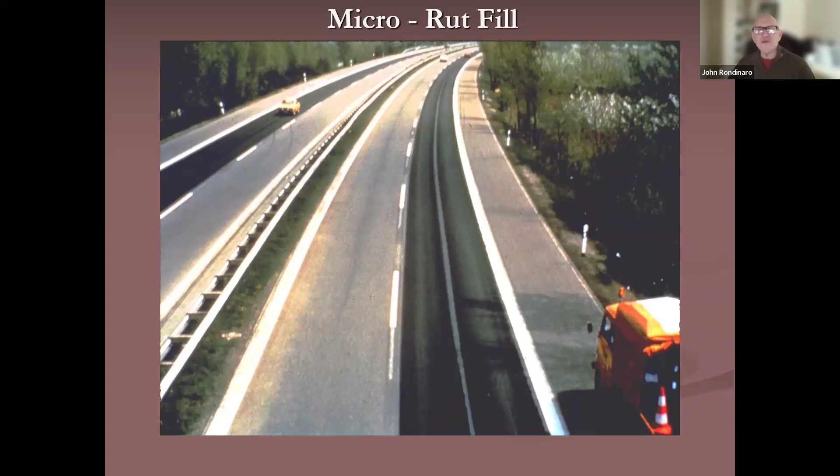Some folks will go in and do two courses of that, and so that's what you're seeing on the right hand side. On the left hand side of this picture, you're seeing that surface with a final surface course placed over the top of that rut fill.

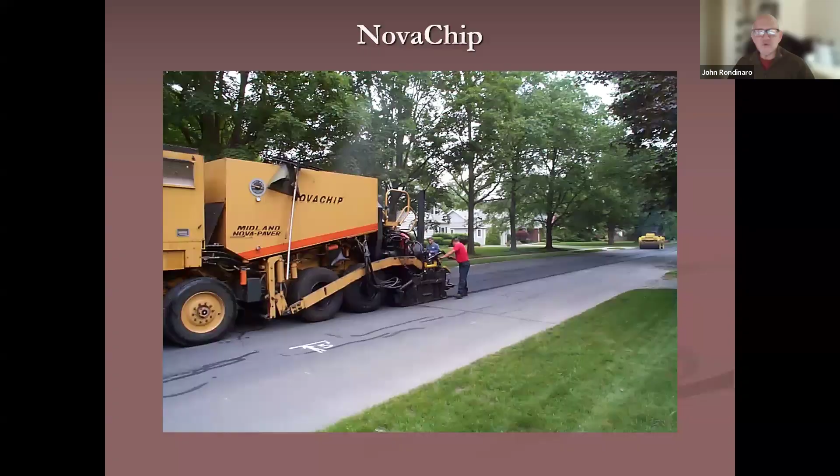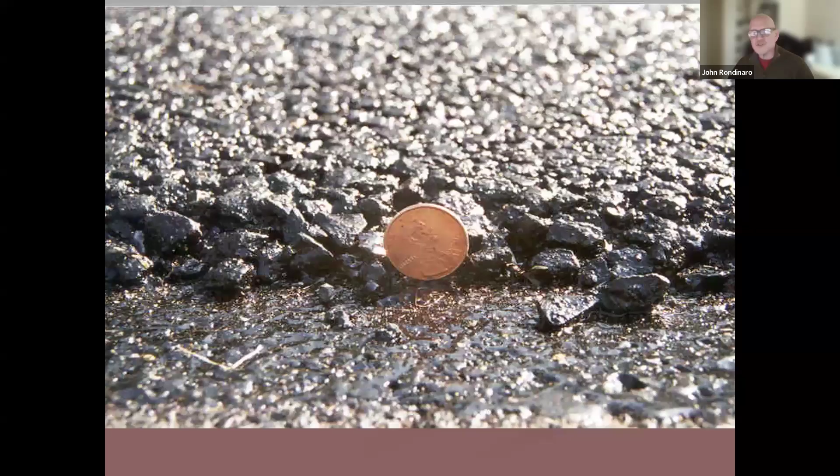NovaChip is that hybrid technology used selectively around the state, but it's a nice one to keep in your toolbox. It's chip seal on steroids, and what you notice here is it's a single stone thickness, and you've got a really highly juiced emulsion. That brown stuff you see below the stone and the penny, that's what's locking in that asphalt course, and this is true armor coating.

It's a pretty sophisticated technology, using a specialized piece of equipment, and that piece of equipment, that paver, actually has a built-in spray bar that's spraying down that highly juiced emulsion, and that's what locks everything together.

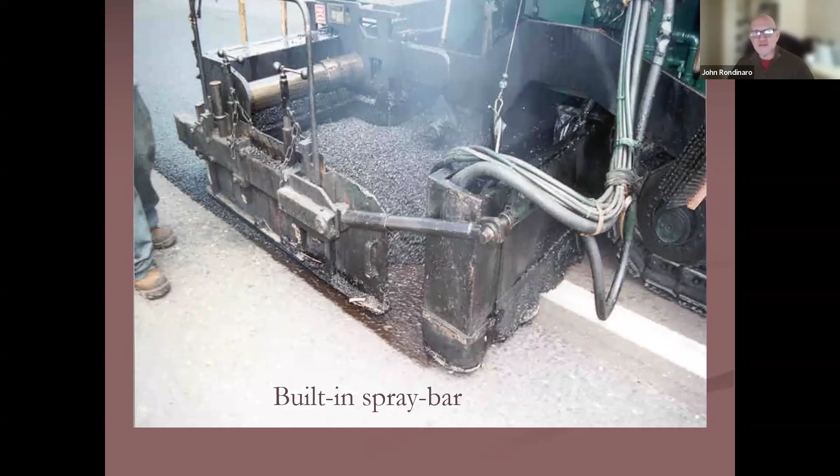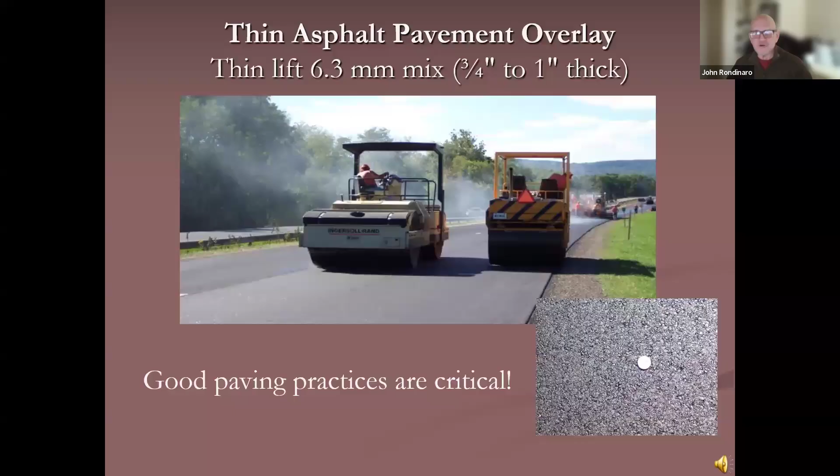And then last but not least, as far as tools in the toolbox, we've got our thin 6.3 mixes. That's a bread and butter technology for DOT. But again, remember, this is a coat of paint. It's not adding any kind of structural support, you're not restoring or adding structure to the pavement. Here, good paving practices are critical, and one of those practices is understanding whether you're working with hot mix or warm mix.

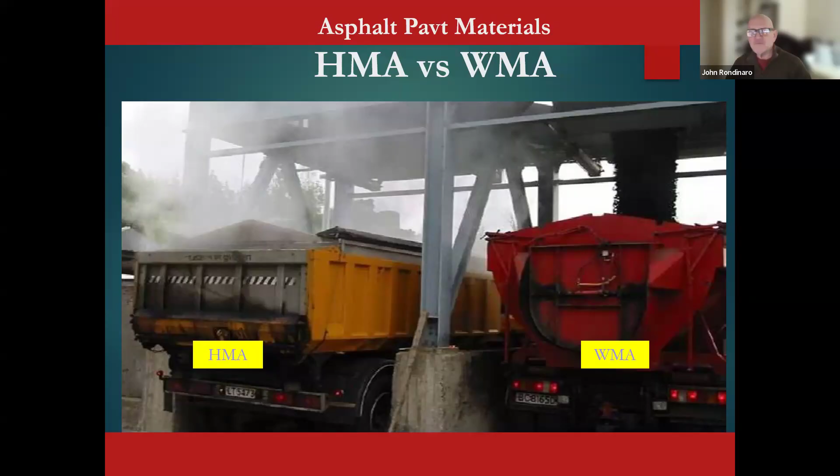I'm going to skip the show of hands. This is, left-hand side is the hot mix, right-hand side is the warm mix. And the difference is you're producing at a lot lower temperature.

Where are we today with warm mix? If you're on a DOT or Thruway project, you're 100% warm mix. The bottom line is warm mix is the same as hot mix. You're producing at a lower temperature, maximum 295. One thing you really need to remember is you've got to get your breakdown rolling done before 235, or it's going to lock up on you. That makes hand work a little more difficult. The key here is you've got to talk to your supplier and make sure you know what you're using.

Getting right into the end of our presentation, what brings it all together? Your pre-project meeting. You're talking about all the players getting together, what the roles and responsibilities are of each, and you're emphasizing safety. The key, you've got to be planning your work. You've got to be thinking what can go wrong, because it probably will go wrong. You've got to have contingencies in place for when that plant breaks down, for when your tack truck doesn't show up, for when your emulsion spray bar is clogged up. You've got to think about all those things and what you're going to do once that happens.

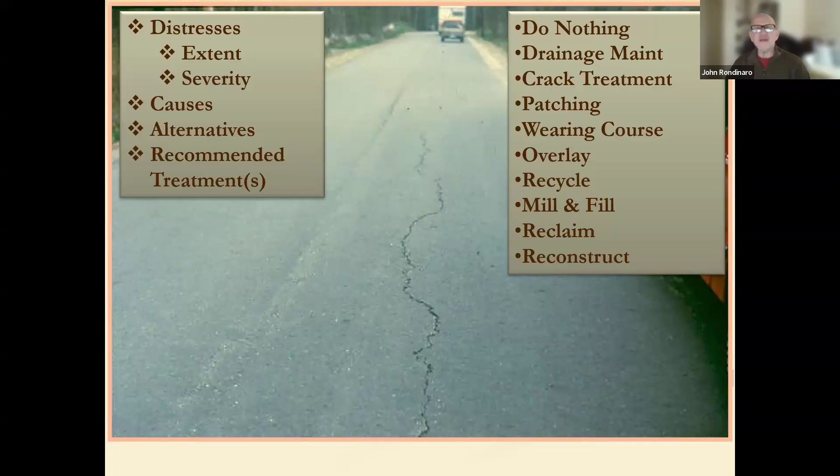So this is what you want. This is the process you use to get there. This is the way you can apply that process, and you can look at any kind of pavement section and apply this.

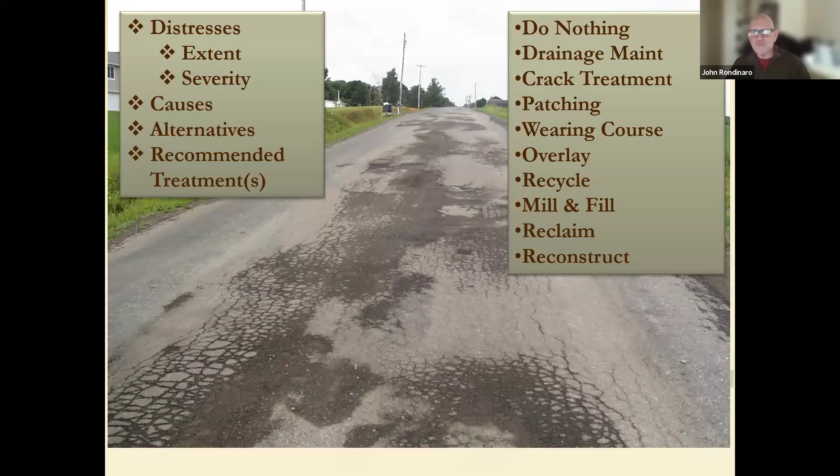Don't want your pavements looking like this. In this case, you're going to need some sort of heavy rehab, low volume. You'd probably be doing reclamation of some sort. And last but not least, what would we do here? Well, plow the snow first and then pray for spring.

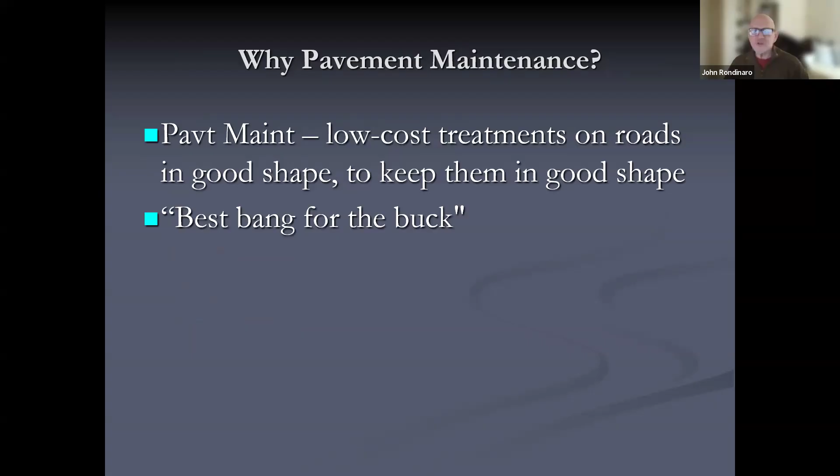So recapping: roads move goods and people, use pavement management. Pavement maintenance, low-cost treatments, and keeping good roads in good shape is your best bang for your buck. You've got a variety of repair options, including crack repairs, patching, thin wearing courses. How do you select them? You go through that decision process, and the question you always answer first is, how's the drainage? And most of all, we think safety first.

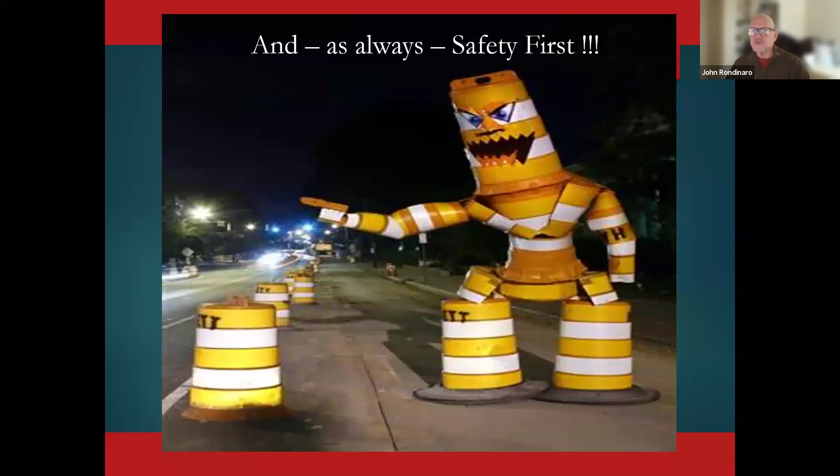So, Jody, before we talk about the workshops, we've got a minute or two—did you want to hit a Zoom question, or should we just open it up for questions, David? John, you actually covered those Zoom questions, people just put it through Q&A. So you hit every mark. Awesome, we don't have to go ahead and do those anymore.

You do have one question in the Q&A: does driveway sealer have a benefit? That's a great question—yes. If you get driveway sealer on a highway pavement, no. Driveway sealer on your driveway, absolutely. You hit it every couple of years, keep the water out of your pavement section. I've band-aided my driveway together with driveway sealer for well past what should have been its useful life. It keeps the water out. Well, the key there is to buy actual driveway sealer with asphalt in it. Yeah, absolutely, because some out there, if you look carefully, are essentially enamel—just paint. So make sure you read the ingredients. Very good point. Ask for a safety data sheet when you buy it, or before you buy it, and you can actually read what's in there. Look for asphalt.

All right, David, did you want to talk about our workshop schedule? The workshop schedule's out. We're starting up this week and going the rest of the spring until highway school. We have pavement maintenance at several spots around the state. The first time we're taking pavement maintenance out is in the middle of April. So get your taxes done and come out to see the pavement maintenance. We'll actually do some hands-on stuff and get a lot more detail than we can cover in an hour.